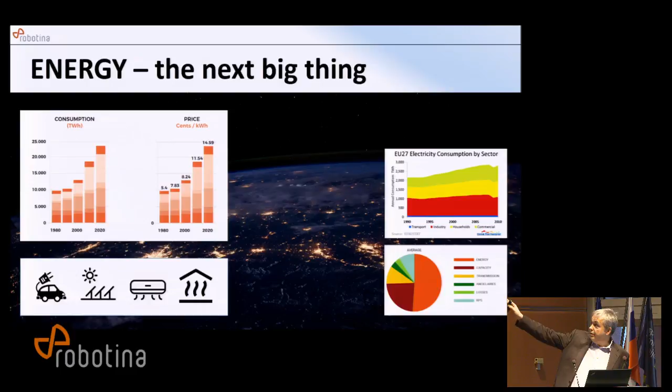Electrical energy is the energy of the moment, and we are changing dramatically many things in the electrical energy world. Look at these two slides: on the right-hand side we have consumption, how electrical energy is consumed. More than 50% of it is consumed in buildings. The lower pie shows the cost of electrical energy. Only about 50% of the electrical energy cost is the generation itself; about a quarter of this cost is the availability, the constant availability of electricity. So it is logical that if we try to do something, we act on the biggest costs first.

So look at the opportunity. We are talking about a 3 trillion euro market at this moment, and in buildings we consume about half of this. If we just consume less, with the right technologies and approach, and consume at a different time, we can save about 260 billion euro, which is not a little money. So there is a magic formula, very simple: reduce consumption and balance the grid, or use electricity when it is cheap.

So when we talk about solutions nowadays, the first thing that comes to mind is technology. When you talk about technology, we think about new technologies like Internet of Things, blockchain, or artificial intelligence. But what do we practically do, or what do we practically think, at the moment somebody says save energy? How do you save energy?

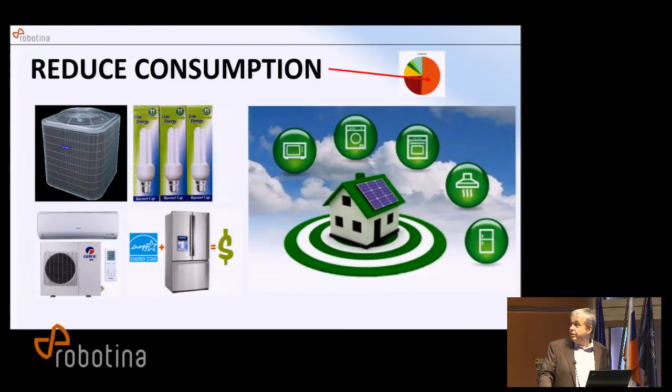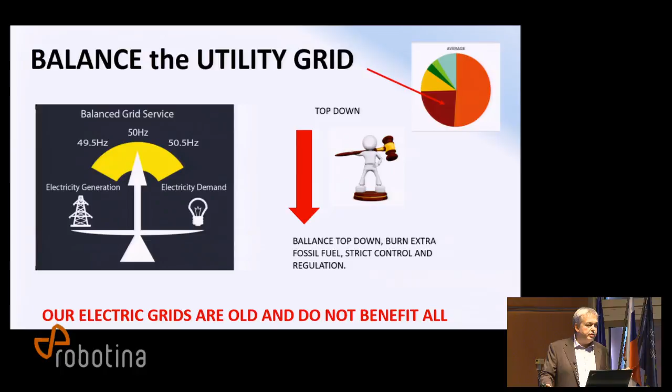We'll see. And if we look at it from the grid, from the utility perspective, they tell us: bring in the regulator and make it more strict, get better control, but everything from the top down, use power. Is this really the right way to do it? Let us think. In your history, in your experience, what brings better results: using muscles or using brain?

Using muscles or brain? Who is for muscles? Who is for brain? Wow, everybody is using brain. So what do we need? Do we need an evolution or do we need a revolution?

Let us explore together, looking at the energy landscape from a bigger perspective. We have everything in place to make our electricity grids better, smarter. There are legal frameworks in place, there is technology, and there is thinking about a smart grid.

On the other hand, we can use smart approaches. We can try to invest little or even nothing, and start saving now. We are looking at solutions that will be future-oriented, that will help save energy, reduce unnecessary consumption, and at the end of the day help us save our planet. Because we just have one planet, and we have to keep it for the children and others coming after us.

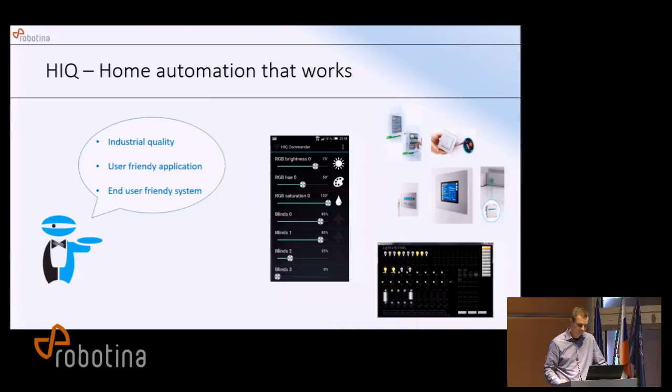Which are the main things we would like to control in our homes? First is comfort control - lights, different types of lights, shades, and of course thermal control. Then we talk about safety and security in our houses. And finally, today's topic, energy efficiency - saving electricity, money, and in the end, our planet.

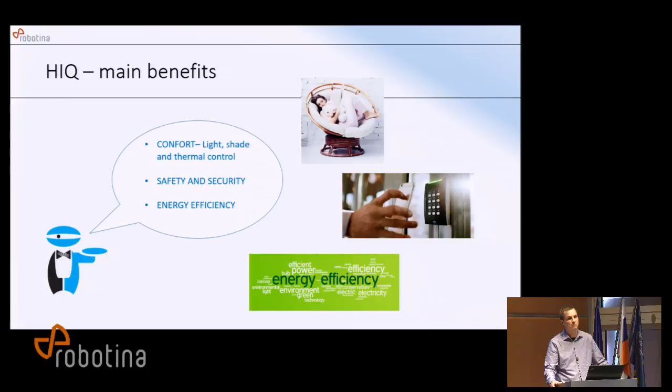In Robotina, we look at our home as a unit, not as a bunch of devices. This is why HIQ controls our home with scenes. For example, you want to watch a movie in the evening, but you don't want to bother standing up, turning off lights, lowering shades, turning on dimmable LED lights. You can just press a button on your smartphone application and HIQ will do it for you.

The same applies in every other situation, so HIQ can adapt to your needs. The same is true with thermal comfort - you can control it either with timetables or schedules, or via phone application when you're not at home. So when arriving, your home is already warm, waiting for you.

Next is safety and security. Our home automation can transform everyday use sensors into alarm sensors when we are not at home, letting us know if something unusual is happening in our house. For example, if CO2 level is rising when we are not at home, we can be sure something unexpected is happening, and HIQ will let us know.

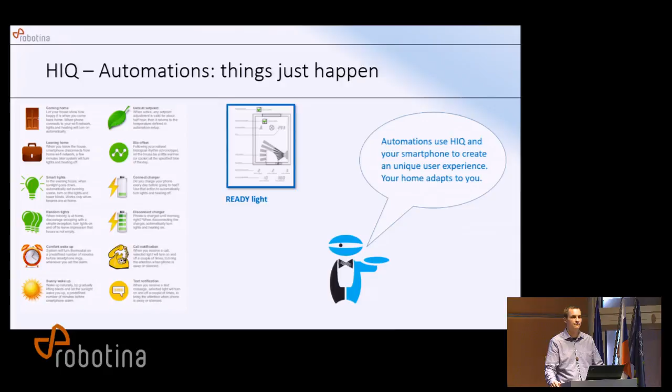Now to the topic of energy efficiency. HIQ has the possibility to make our home as efficient as possible. It will help us understand when and how we use our electrical energy. It can also help us use our loads, our devices, when we generate our own solar electricity or when the price of electricity is cheaper. Also, it can maximize our self-consumption using battery storage.

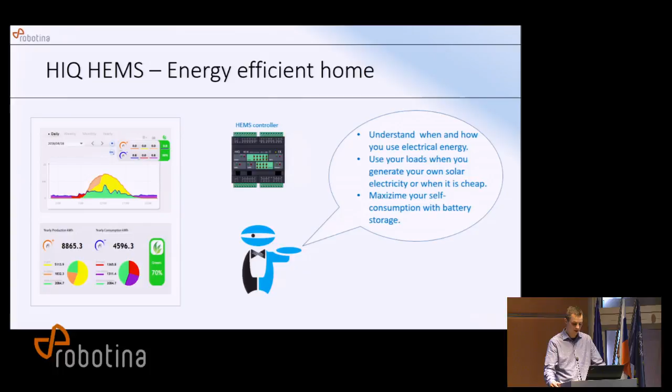Furthermore, we can gain even more benefits by connecting to the HIQ Universe IoT platform. My colleagues will explain more about it later. We can also save energy and money and contribute to the green society by becoming an active prosumer. So that's from my side.

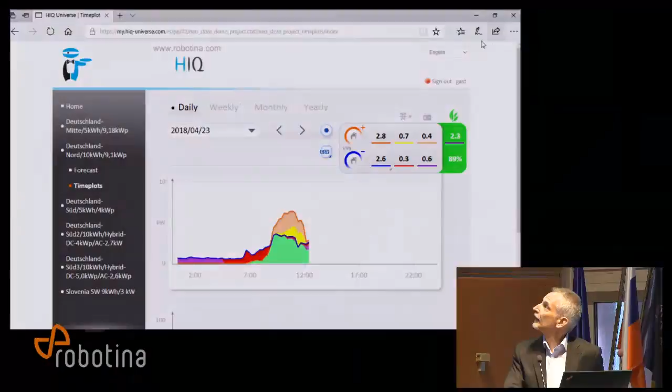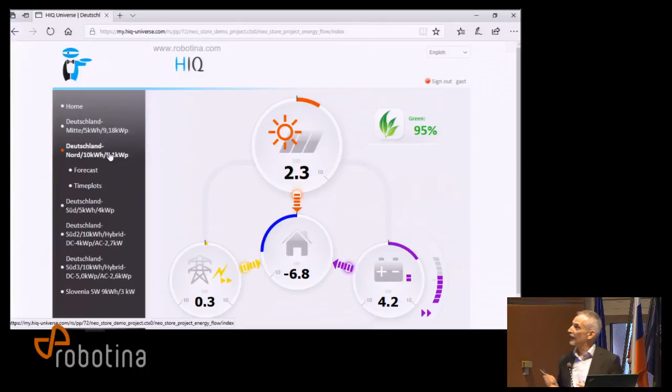So here it is. This is a live system now somewhere in northern Germany. This is our typical customer actually in Germany. The house owner has a photovoltaic plant on the rooftop.

You can see it produces 2.3 kilowatts at the moment. The house owner also has a battery storage system, which has 9.1 kilowatt, 10 kilowatt hours of battery capacity. It is, of course, connected to the electrical grid, and the house is a consumer. We focus here on the house, not individual equipment, but the house as a building.

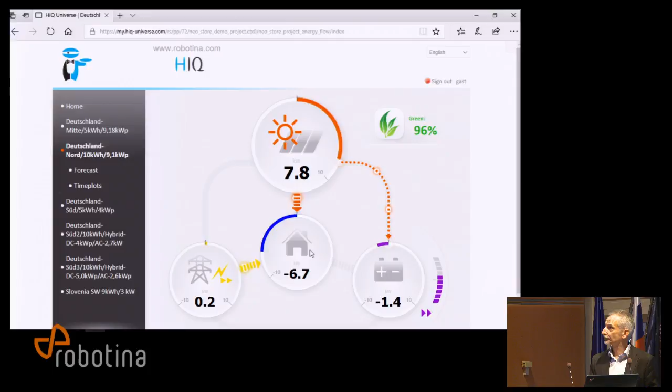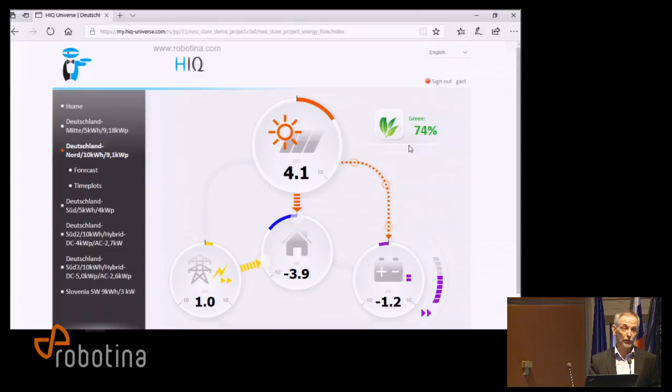Usually our customers are very much interested in the figure up here, how much am I green? This means how much of my own consumption am I able to take from my renewable solar roof or from battery? Of course, the next question is, what do I achieve within the day?

You can see today there's a nice sunny day in northern Germany. This is shown by the orange line here, which shows the production from the PV rooftop plant. The other line, the blue line, shows the consumption at the connection point of the building to the grid.

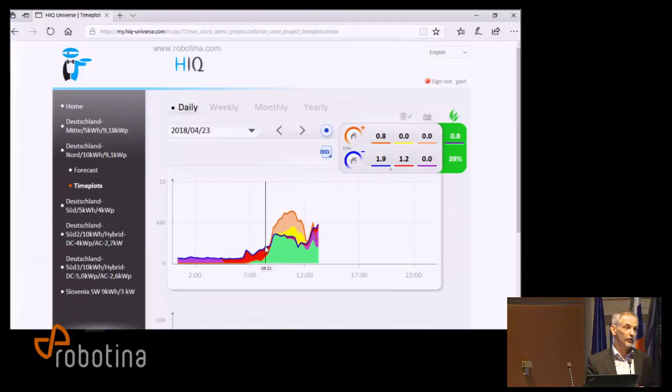You can see in the morning when the sun was starting to produce electrical energy, the consumption, the blue line, was taken from the solar plant directly. Before, in the nighttime, the consumption was fueled from the battery, and then after the battery was emptied, the house took the electricity from the grid. This is the red surface right here.

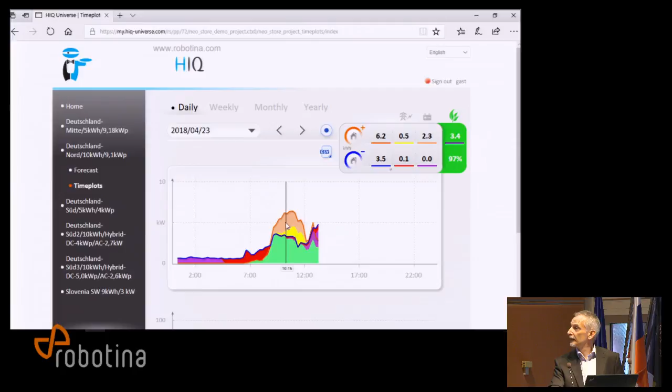Then, when the sun comes out, we get more and more electrical energy from the solar rooftop, and we're able to cover all needs here at 9:30. Everything is fueled by the PV. Then, all of a sudden, we have an excess of electrical power from the roof, and that's why the battery is here - the house owner wants to maximize his own consumption. That's why the surplus of electrical energy is stored into the battery, and after the battery cannot take the energy, the excess is fed into the grid.

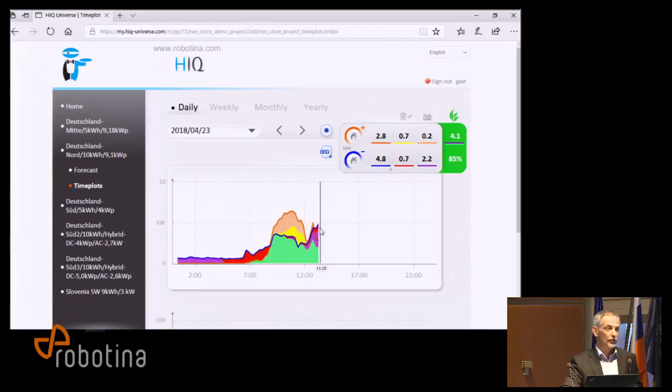So you see the profile of consumption. Now it seems we'll have an early afternoon peak. And PV is not enough, so something is again taken from the electrical grid.

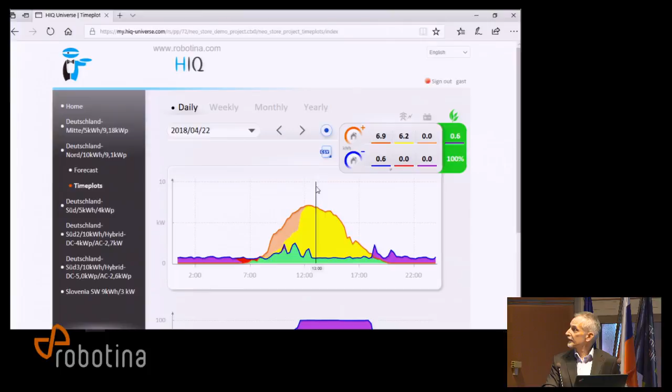Let's take a look at the yesterday performance. You can again see a very nice, shiny day. All what was needed was taken from the renewable, and the day before shows that also from the grid it was really just a small amount of energy taken.

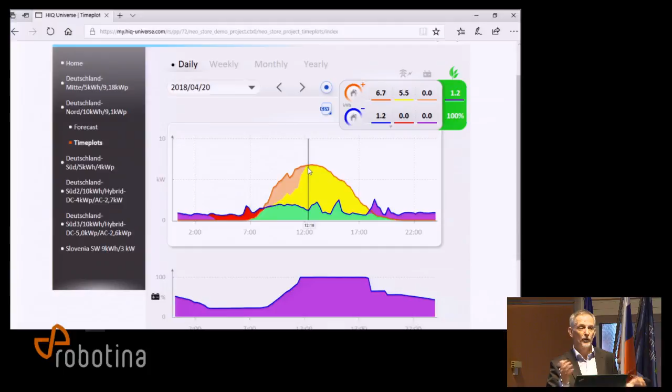Below you can see performance of the battery. At 11 o'clock it was 100% full, and then in the afternoon the energy was discharged to feed the consumption in the house. So the house owner knows exactly each day what is the profile of PV, how much do I produce, how much do I consume, do I match demand response, am I self-sufficient, so to say.

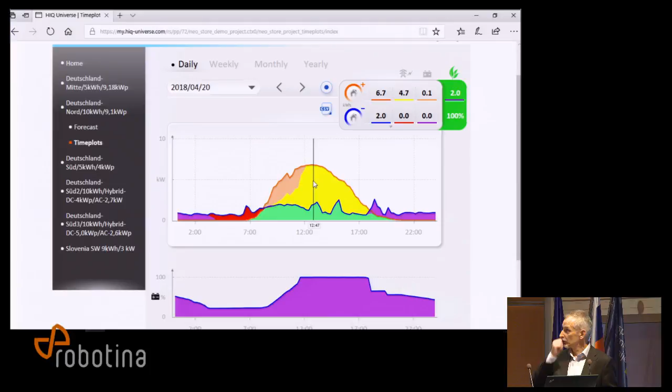Of course, self-sufficiency here is not the big thing. It's how the owner perceives the equipment, but of course he is connected to the grid, and always will also be.

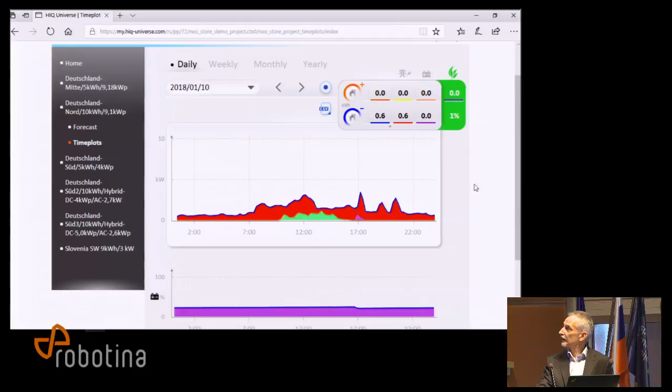We'll take a look at one day, let's say in January. Of course, then the situation is completely different. So you can see the green surface - this green surface is taken from the PV, but all the rest is taken from the grid. This is very normal in winter time in mid-Europe, and only a bit was put into the battery.

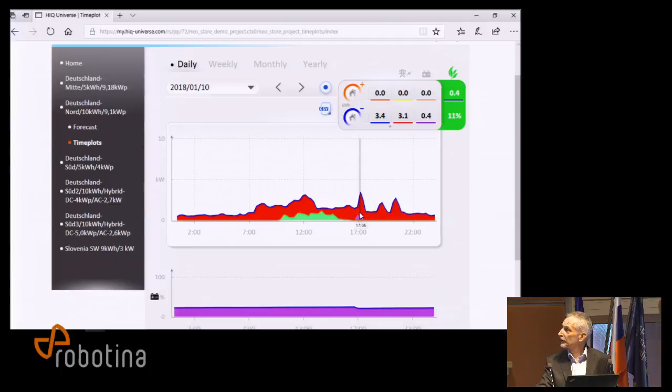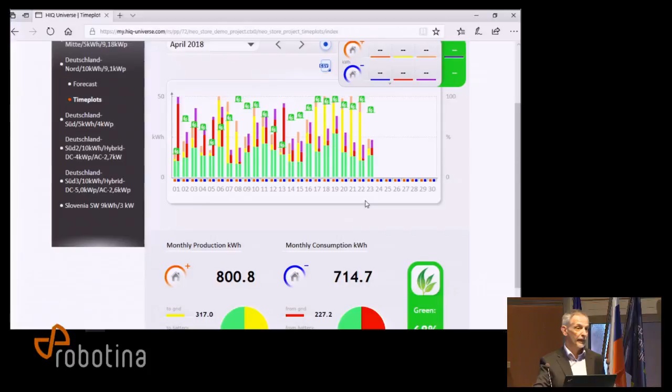Then the house owner would like to know: what do I achieve throughout the month? What are my daily achievements within the month, each day? What do I get out of my equipment? Because she invested, you might say, 10 to 15,000 euro in the equipment. So how do I perform?

And this index over here is showing the level of being self-sufficient. Of course, it differs from day to day. The average within the complete month is 68%. So the house owner can be quite happy with this result.

Monthly consumption and monthly production also are almost aligned, which is also good. This is also good for the Slovene scenario right now, which is net metering. So the user will not pay that much for the grid electricity, and also will not feed back into the grid too much.

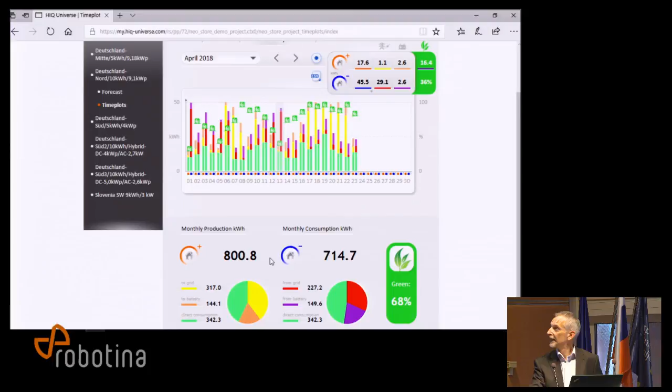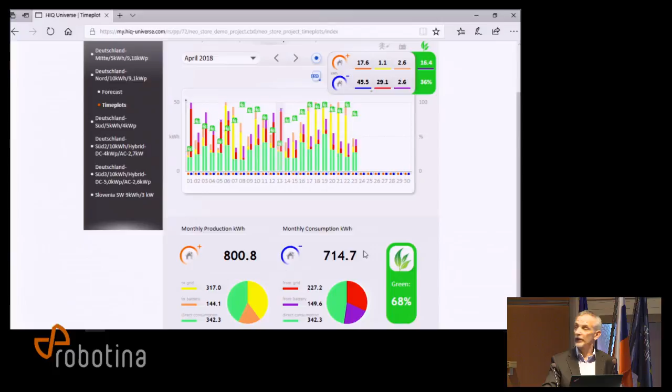And the user can also see what is the monthly consumption, but not only as a sum, but also the daily profile. When is my peak consumption? Why? So he or she can think about his own consumption in the house. How can I reduce the consumption?

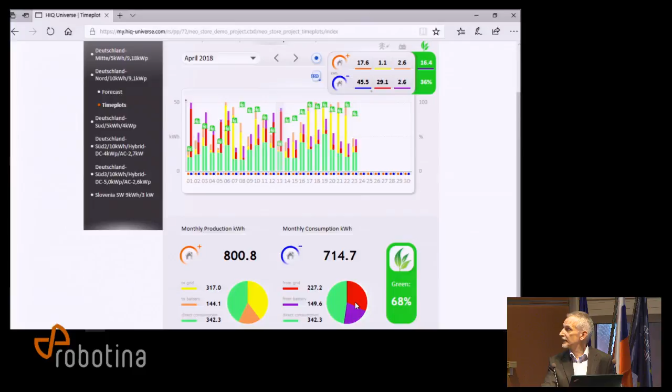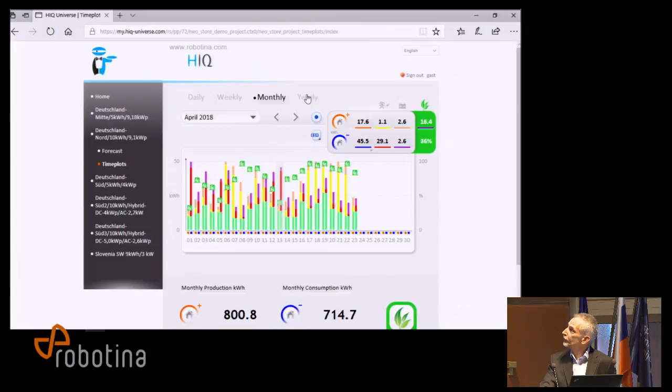Also, the user can see whether the battery capacity is okay, whether there could be more rooftop solar, things like that. And the most important thing, I would say, is also to be aware of the yearly production and consumption. So what do I achieve? Let's take a look at year 2017, when we have a complete year.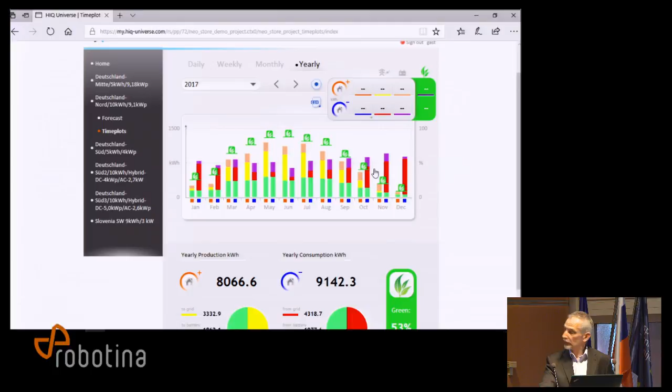What do I achieve throughout the year? Again, consumption and production is pretty much matched. And of course, there will be no systems which are disconnected from the grid. We want, by this system, to enable the house owner to maximize self-consumption by usage of his own rooftop PV and battery storage, and then the owner can start to think about...

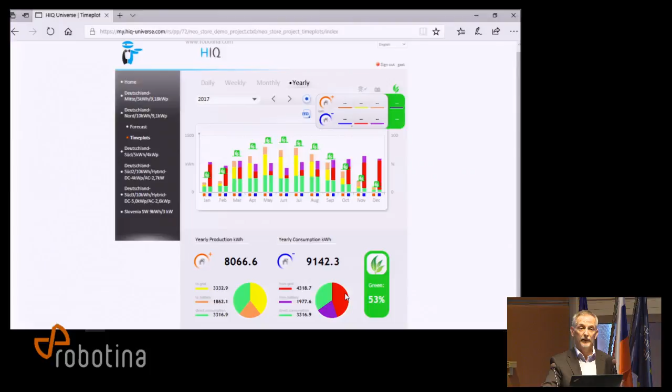How can I increase my self-consumption? How can I get rid of this yellow surface which is showing that this energy was fed into the grid, and vice versa? How could I improve own generation in winter months?

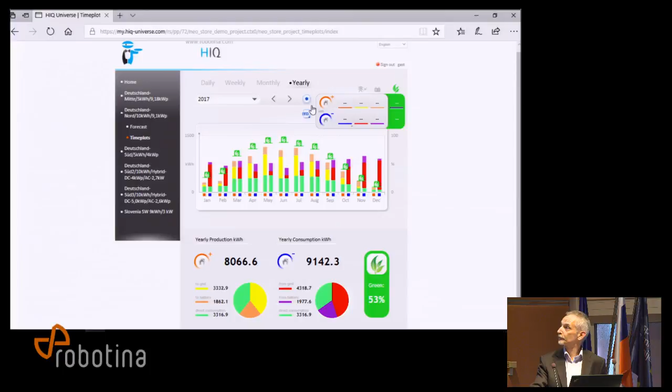So by this, the user, the homeowner, can be quite satisfied. He or she is contributing to green society, contributing to renewable energy sources. So the system shows the performance.

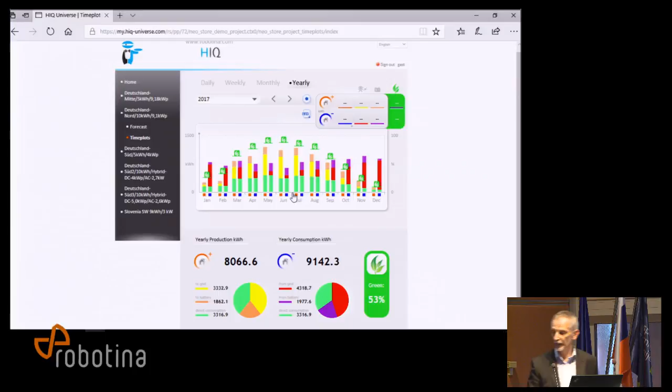What would you be interested in if you would be a house owner of a system like this? Do you have any idea what would arouse your attention? For example, what is the return on investment of those 50,000 euros?

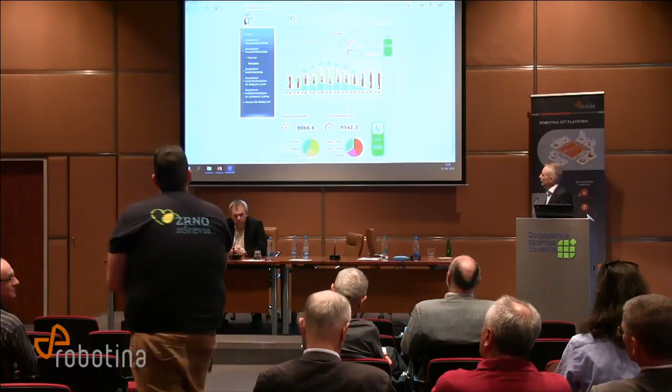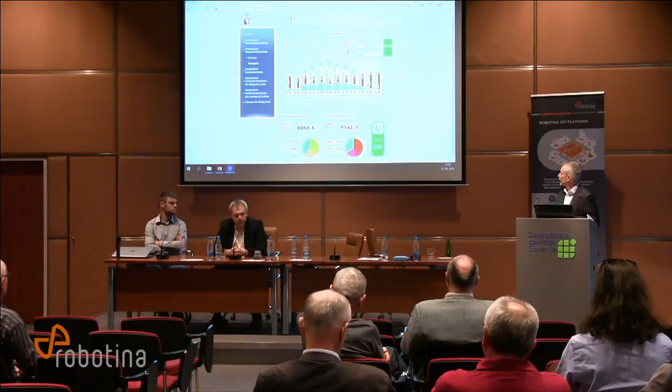Yes, this is a good question, and this is particularly a good question for Germany. Thank you for this question, because the ROI actually comes from the conditions, the regulation that are put in the German market. And this says that the grid electricity bought for house consumption is charged at 29 euro cents per kilowatt hour.

On the other hand, when you feed into the grid, you get only 12 or something euro cents per kilowatt hour. So this gives you a ratio of return of about 8 to 10 years nowadays in Germany. And of course the feed-in tariff goes down to zero, and they say also that the price of energy will go up.

So basically the decision to invest in such a system is based on this: let me help the green society, let me feel secure about my future and not exposed to risks of increased prices in future. Because the system is in operation for 20 years, so the remaining from, let's say, 8 to 20 years is something that you really earn.

To give a short note on the situation in Slovenia, this scenario does not work. With net metering as it is now implemented in Slovenia, you only care about yearly achievement. So is this matched? In principle, the difference is not too big in one direction or the other, then I'm satisfied. So nobody really cares what happens within the day. All this burden, when you get a lot of PV, is then put on the grid operator, and this is what we speak about in the next section.

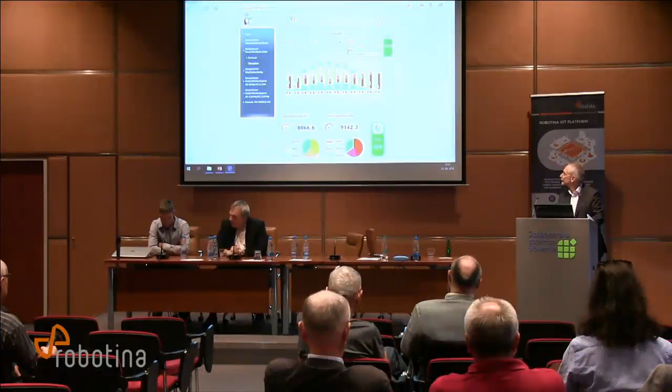I will skip the slides which I prepared for safety in case there would be no internet. So this is like a wrap-up.

Yesterday was Earth Day, the 22nd of April. So how can I help to save the blue planet? As we said, by promoting or investing in renewable power, by minimizing usage of fossil fuels, self-consumption of green energy, and of course energy efficiency. So with our system, we actually promote a green thinking attitude at the house owners.

But then the other part. As I said, there are different concepts to promote investments in renewable energy sources, and you might know there were huge supportive schemes in Germany called feed-in tariffs 10, 15 years back, when users could earn up to 50 euro cents per kilowatt hour. Of course, the price of equipment was not as it is today. But the strategy was to lower the feed-in tariff yearly, and by this, the challenges which arise somehow motivate people to cooperate in bringing stability to the electrical grid, which is now in transformation.

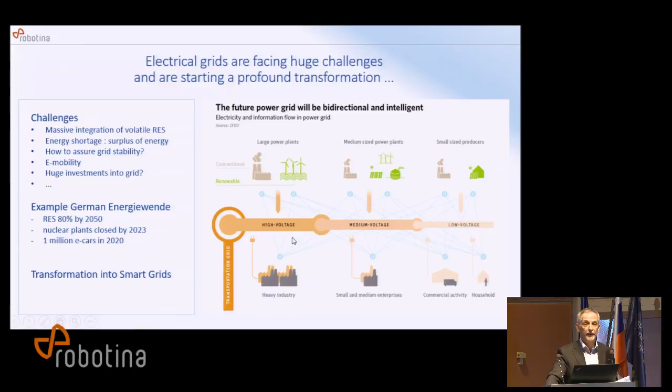So this brings us to the main idea of how, with HEMS systems provided by Robotina and HIQ Universe, which integrates HEMS in one platform, prosumers can contribute to electrical grid stability.

These are the houses all over the place. Each house has its own, as we saw, consumption profile. It might have the rooftop generator, electrical car, whatever. So each house has its own energy profile.

This means that when you promote the feed-in tariff, everybody will just feed electricity into the grid, causing congestion, or there will be excess electricity when there is peak production. And another way, when there's peak consumption, again you have no contribution from them. So our idea is that we aggregate the prosumers, the houses, by their own energy management systems, aggregate them on the level of HIQ Universe, create flexibility of usage of electrical energy in time, and offer this flexibility to grid operators to more easily or dynamically manage the electrical grid through participation of HEMS prosumers.

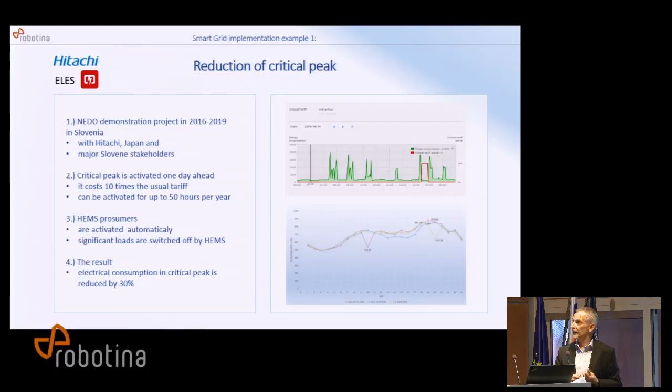The third situation is introduction of HEMS, which can be much more flexible than these two. You cannot really control those other methods well, or you can have very good results at the very beginning with sending SMS, but then people might not follow anymore. So the HEMS system is integrated into home energy management, and the idea is also to integrate it later on with smart home automation.

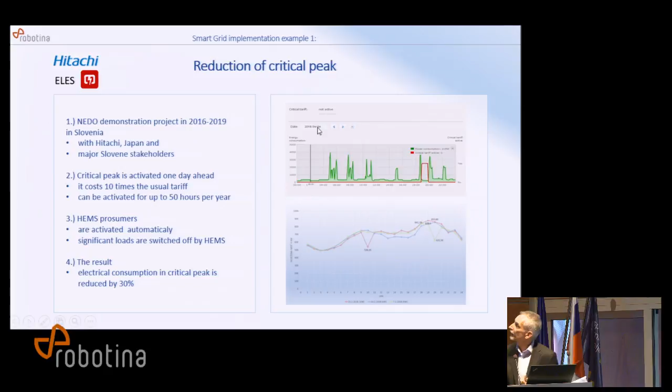So the HEMS prosumers get activation automatically - server-to-server communication between the ELES server and HEMS server, HIQ Universe, sends the forecast for the next day. Here in the upper right corner you can see one such scenario, from April this year, and this is the activation.

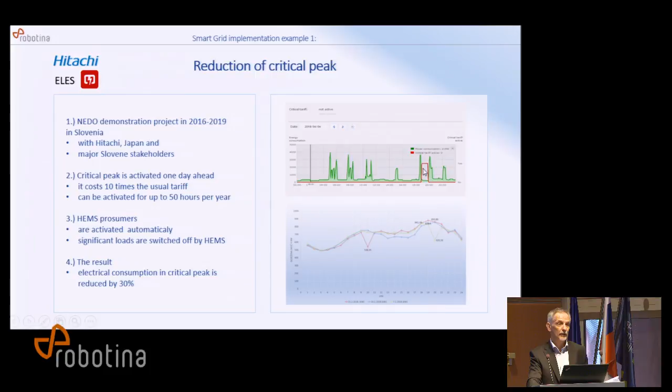Between 7 and 8 p.m. is the critical peak. Our HEMS system receives this from the server and then activates at the prosumer so that significant loads are switched off. By this, you can see very clearly the peak consumption is really minimized. Of course, we cannot switch everything, but what is controllable, we take into the system, and we really guarantee that this will be reached.

There are also results already available from the grid operator, Elektro Maribor. They say that when they did the activation, the result as a whole was a reduction of critical peak, on average, by 30%.

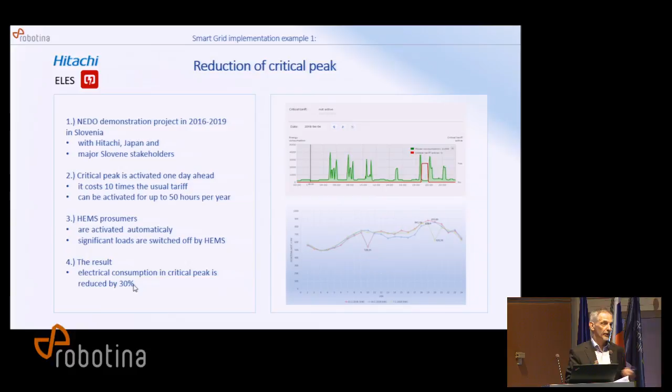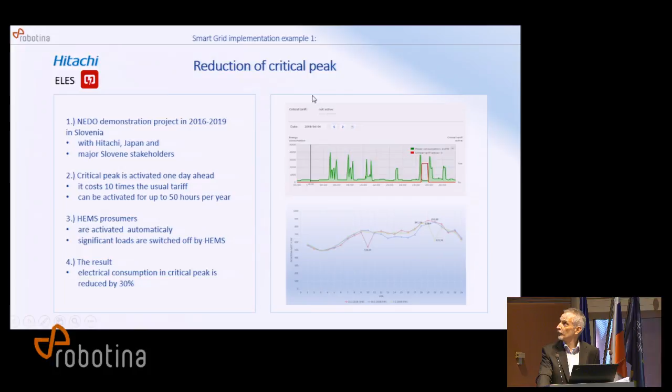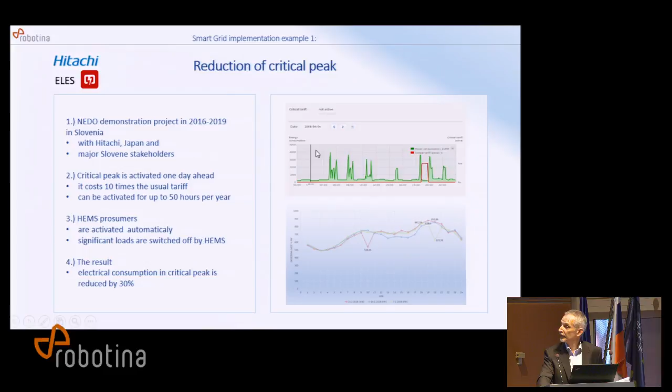So the achievement is quite good, and it shows the potential - although you might say one house doesn't contribute a lot, when you put many houses in the region, you can really achieve local targets. You can be really dynamic in this reduction of peak, which is very good for the DSO because they might avoid huge investments in the grid at the region, in cables or transformer stations, whatever the situation is at the site.

Another example of smart grid implementation is a project also supported by NEDO, the governmental agency from Japan, again with Hitachi Chemical here, one of the major vendors of lithium-ion batteries globally. They selected Robotina to deliver the energy management system for the project, on the German side, in Speyer, Germany.

The idea is to prepare an energy management model for the future - from a feed-in tariff system, Eigenverbrauch as Germans say, to participating optimization of usage according to local circumstances.

In this particular project, these local circumstances are reflected in the price of energy. So the price of energy is set hourly - each hour, one to four days ahead, gets a particular energy price, both electrical and heat.

So our system is prepared in a way that it is able to optimize in-house production and consumption accordingly, so that the user has minimum costs, and the DSO gets good stability of the grid. Domen will later on tell much more about this, but just to say what are the main features.

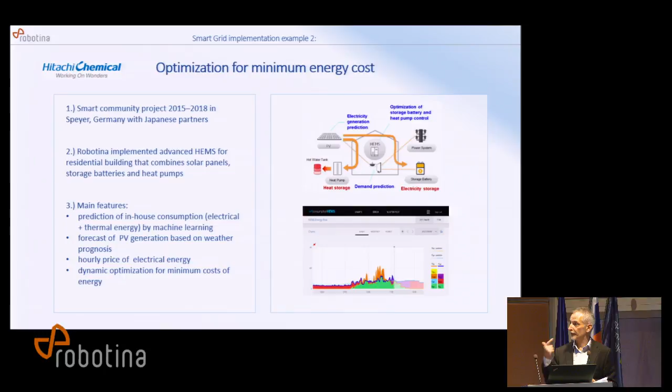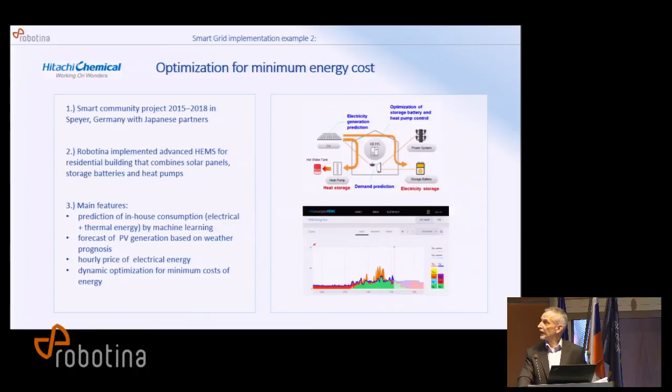We get SOC for the batteries, we have temperature for the heat pump and for heat reservoirs, and by this we really adapt to what the DSO needs. So this is really, I might say, a state-of-the-art implementation of a smart grid project.

And the third one is H2020, European-funded research and development, but mostly it's an implementation, demonstration project, which puts together the stakeholders who are all relevant to take this smart grid into consideration. So there are DSOs from Germany, Switzerland, and Cyprus.

There are institutions, faculties, universities that help them in local implementation of such a system. There are solution providers from Slovenia, 3 companies: INEA, Etrel, and Robotina. And there is IBM as a managing partner. So it's quite a challenging project.

Our ambition is to set up a vertically integrated solution which will enable dynamic trading of electrical flexibility. So when you have a potential to adapt to something by changing your behavior of electrical consumption, you offer this to the grid operator or to the system, to the automatic trading platform.

We call this a flex offer. You send the flex offer to the platform. The platform knows what is the situation in the market, because this is reflected by the energy price, which in the market changes constantly. And then they give us feedback on whether we should increase consumption, minimize it, or what would be the schedule for the next hour, 4 hours, whatever the period.

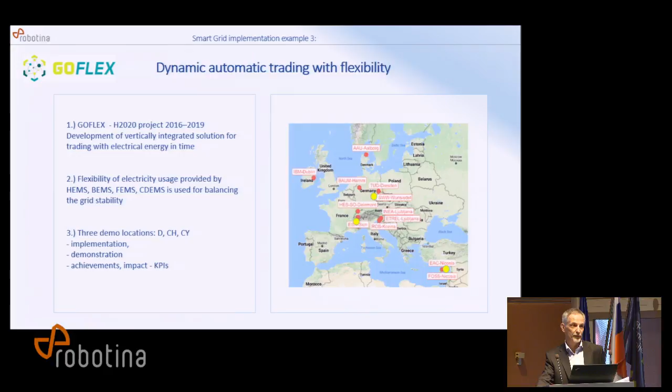So this is something like a wrap-up for this mind shift that we are trying to enable, the change into a decentralized energy market, which is implemented massively with renewable energy sources. So traditional, on the left hand, there are concepts like feed-in tariff, limitation of PV generation by just maximizing the PV output, net metering, fixed daily tariffs.

So the core thing is that all these concepts put all the burden onto grid operators. All the costs, all the burden, everything is on the operator. The investors just take money from governmental support, incentives, and they are happy. So they only care about maximum production and return on investment.

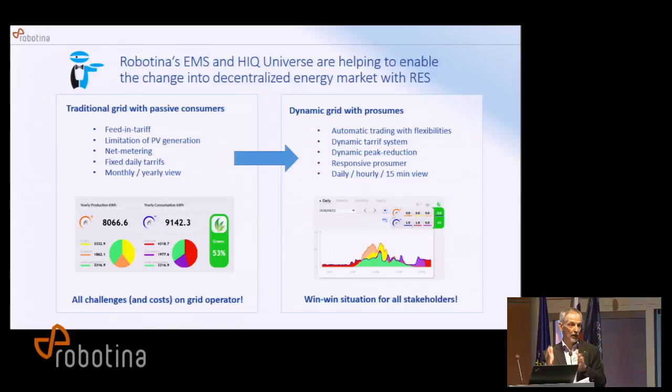So this has to be changed when renewables are implemented massively, because we need really dynamic grid stability. There are concepts which I just showed a few: automatic trading with flexibilities, dynamic tariff system, dynamic peak reduction, and all of those really want to activate the flexibility at the consumers and make them prosumers. So the time horizon changes from year or month to day, hour, or 15 minutes, or even less, to be really dynamically responsive. And this should really bring a win-win situation for all stakeholders involved.

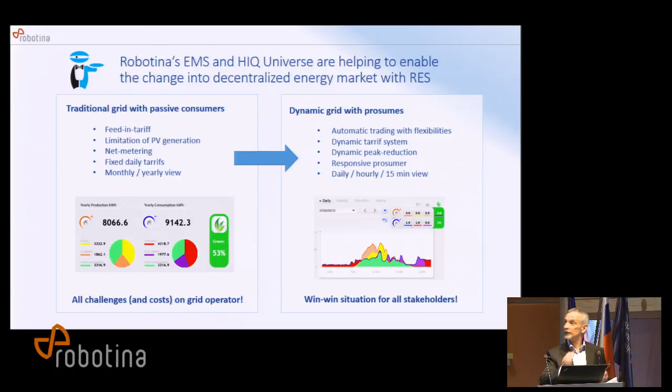Do you have any comments maybe here? Somebody from the audience, do you agree with this basic idea, basic concept?

Yes? I understand right. If I understand right, this is the sharing of electricity between these stakeholders.

Sorry, can you please repeat? I did not really get the point. If I understand right, this is the sharing of electricity, excess of electricity between these stakeholders. So the idea is that each of the stakeholders - the transmission grid, the DSOs, the traders with electrical energy, and the consumers - they all look at the real viable challenging items which can make the difference, so that real relevant issues are addressed in the right way.

And with all these renewables installed in the grid, this means dynamic optimization of usage, matching the production. This is the main idea. And as said, the real game changer will be massive implementation of electrical cars, because many of you are aware that it is not possible to fuel a lot of electrical cars with the existing grid. So huge investments will have to be made to enable this, but this is then the right approach.

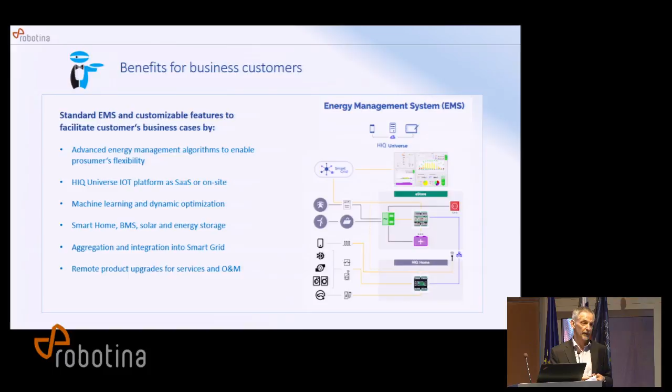Thank you for your attention. I can take one or two questions.

Yes, thank you very much for your presentation. I wonder if you have any calculations regarding, let's say, cost for CO2 emission reduction of 20% by 2030 or something like that. What would be the result if we include 50% of Slovenian homes into such a system? And of course, what would be the cost of investment?

Thank you for your question. Unfortunately, we do not have such a calculation in the company. We are a bottom-up provider, so we want to enable the implementation of such a system, but the relation to national policies and the calculations, as you said, should come somewhere in between. We'd like to share with you how we see it - we prepared a bunch of products. Just now we have a new family of HEMS products which enable easy retrofit installations, because we know we have to enable retrofit in existing houses with no wiring, with wireless implementation, to make it easy and cheap. So we want to enable massive implementation of such systems, because one house does not bring a lot of tons of CO2, but plenty of them, they really contribute.

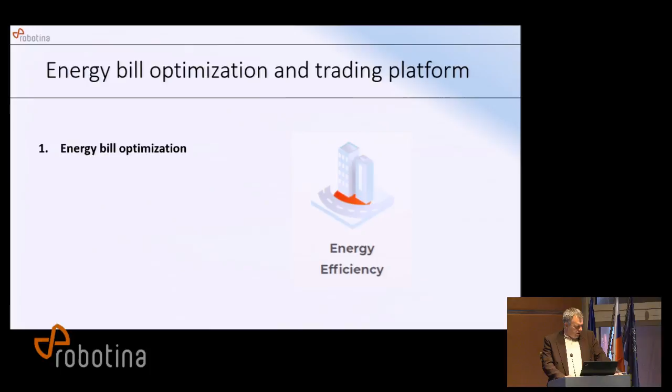Next one is group buying. So we will aggregate users that are part of the community, and we will buy electricity together. When you have 1,000 or 10,000 users buying electricity, you have much more negotiation power than if you are buying by yourself. Actually, if you are buying by yourself, you cannot negotiate, you can just choose which provider you will choose. But if you are 10,000 users, then you can also make requests to your electricity power supplier.

And the next one is power trade. We have heard about photovoltaic and also batteries, and we can sell this electricity together. If we are selling a couple of kilowatt hours, it's not very much, but with 1,000 or 10,000 users together, there is 20,000 kilowatt hours or 50,000 kilowatt hours. That's quite a bit, and we will sell it to the best bidder.

We can also do something else - switch off devices for a short period of time. Boiler, heating, air conditioner, all can be switched off for a short period so comfort won't be affected. But combined together, these power savings will be something, and it could be sold to the grid when needed, especially when demand is high.

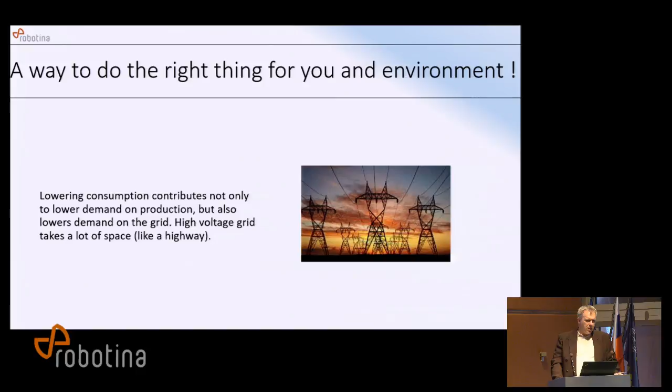And let's call this a responsible view: if we consume less, we don't just put less pressure on power generating, but we can also put less load on the power grid. And the power grid is quite expensive, and it also takes a lot of space. One high voltage power grid takes nearly as much space as a highway. So the good things are here.

So for conclusion, using our smart technology will help you optimize your electricity bill in three ways. It will enable you to even earn money selling surplus energy to the grid, and you will also do something good for the environment.

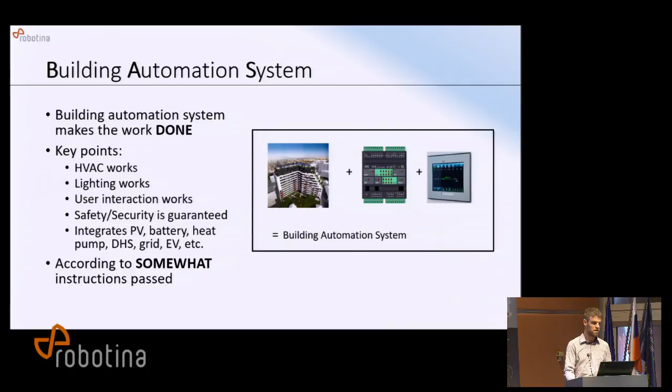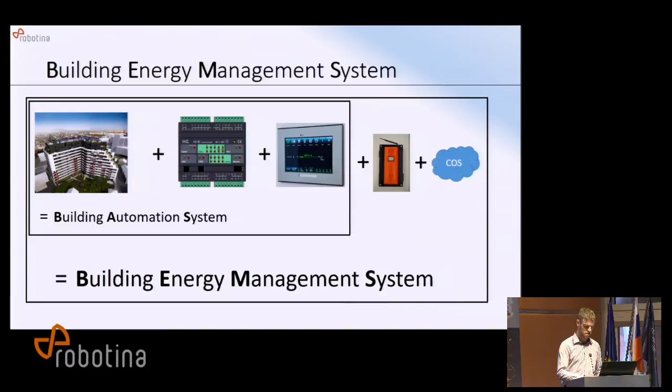So we can think about dynamic pricing in the future, and therefore we are introducing the IoT linker to connect this building automation system to the cloud, which is our notation as a cognitive optimization system, so that this energy management system can take various different requests from the user, from the grid, from our components installed, to make smart and optimal decisions, which we would like to achieve with this system.

So the building energy management system is the one who determines the instructions mentioned before. But how to do this? Would we like to save energy and be efficient, or would we like to increase comfort, experience, or well-being at our home? Would we like to do some trading with energy - buy at a lower price and sell at a higher price, which was already mentioned before?

And if we know that we have some heat pump with a water storage tank, or batteries, or just a water boiler, Dusan already explained how we could also do some energy shifting - shifting the buying of energy from the grid, so that we heat our boiler a bit earlier at a lower price and just consume it later when the price for electricity is higher.

However, our cognitive optimization system does integrate various concepts. Especially, we are focused on energy efficiency, on smart grids, and we integrate automation with security, and try to do some fault detection to improve the reliability of our system.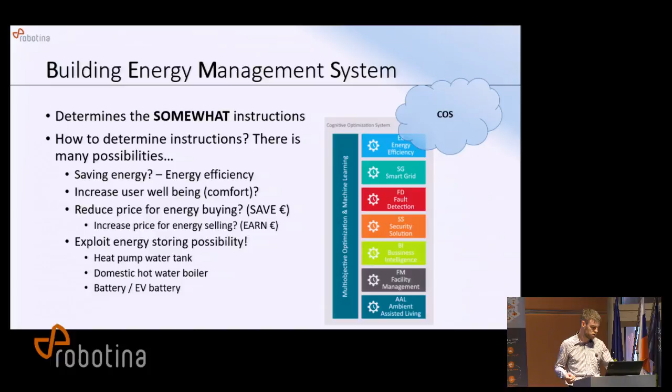Our wishes are contradictory by default, so it's very popular to be green and eco today, but on the other side we would like to feel comfort. So how to manage these things? It's the point of optimization.

I'll give you two brief examples how we cope with that. One example will be in the grid trading, and the other will be in comfort management at home.

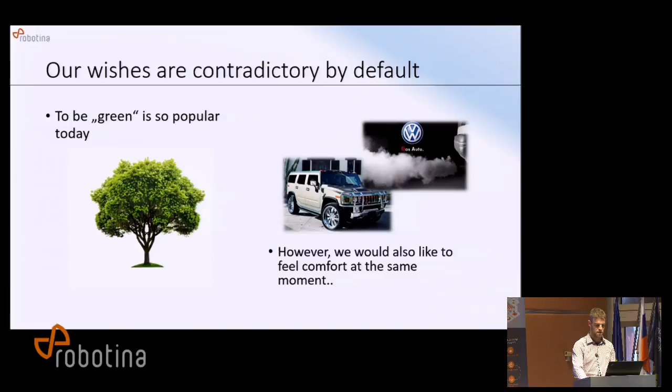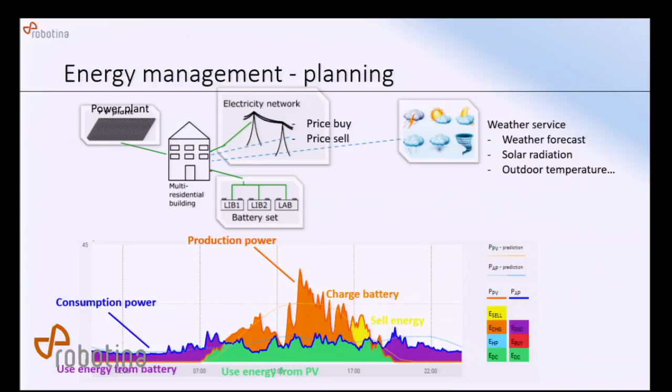So imagine this chart, maybe it's familiar to you from before. Here you can see some areas explaining where this energy comes from or where it goes to. But the most important thing is the apartment's consumption, which is the blue line here. And of course here we have a solar power plant, so this line shows the production.

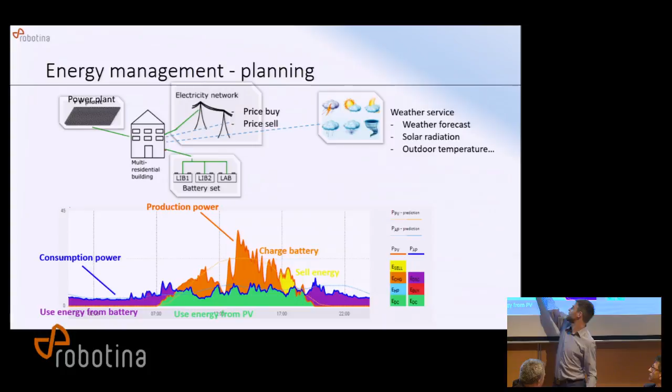There were some clouds around. However, we can see that this is quite a fluctuating thing. So it's very important here to have some battery so it can make a buffer, to not expose these fluctuations to the grid.

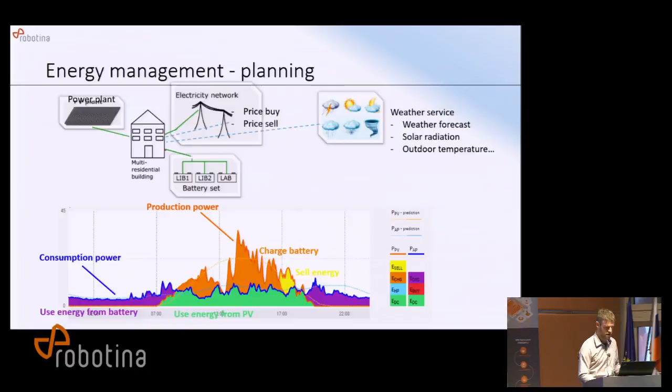However, that was yesterday. How will today be? We are now at some moment, so what would you like to do? Would you like to sell energy for low price? Would we rather store energy and maybe sell it later, so a lot of questions. Should we charge batteries? Should we charge the electric vehicle? Will we need it? Will we need heating?

So that's actually the question for management. Which action is optimal for my budget, for my environment, and for my comfort? So we should first ask the question: what will happen in the future?

So the first part of energy management is prediction. What will happen in the future? Because if we can do more or less accurate predictions, we can make more or less good plans afterward.

So first, there is measurement. We come to the point when we want to question: shall we buy, shall we sell, shall we charge, discharge, shall we heat the boiler, and so on. So the other part is forecasting, and here is some example.

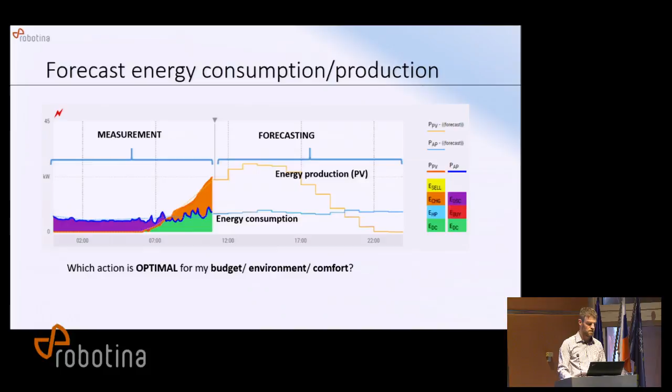Forecasted energy consumption profile and forecasted energy production profile. When we do this, we have a good baseline to do the planning part. So that's the other important part after the forecasting.

And we decide, okay, let's charge the battery there, we will sell energy, and on the bottom we will consume energy. Maybe this chart is quite intuitive, not so complex, but imagine if we have a lot of components and energy price. Maybe if the price profile would be a bit different, this plan would not be relevant.

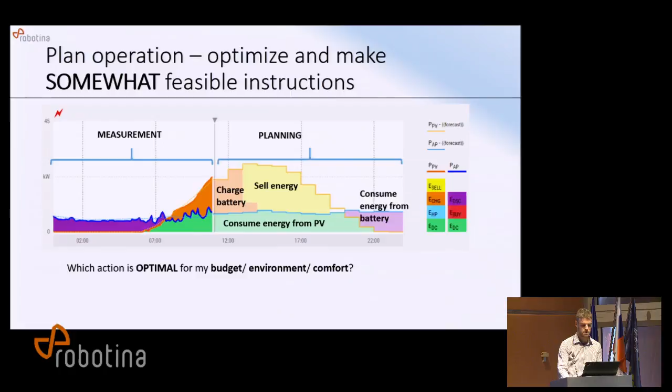So now I would just briefly jump to the other side, so the comfort and energy management. I mentioned before that these goals are normally contradictory. More comfort is normally more energy consumption, and vice versa, less comfort is less energy consumption.

So we can stay in some normal way, have some schedules, they work, they quite reflect our demand. But if we want to increase the comfort, we will probably have to increase the energy consumption.

So our quite simple, intuitive philosophy is to take care of comfort when it is needed. So for example, if we are at home, let's have better comfort, let's take care that heating will work, that we will not save on lights and walk blindly through home in the darkness.

But when we are not at home, let's reduce that consumption as much as possible. So it can lead to some saving, but as mentioned before, when the system does it all for us, it can together summarize into larger savings.

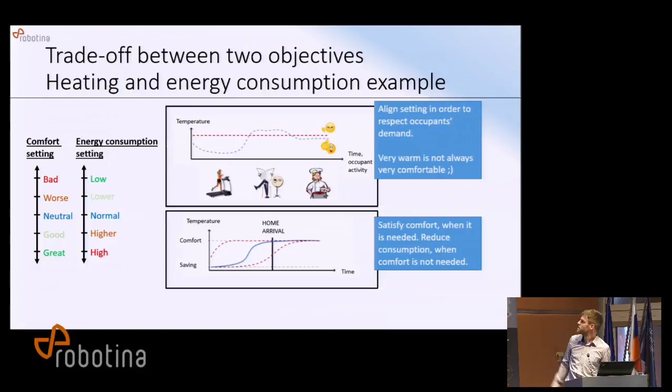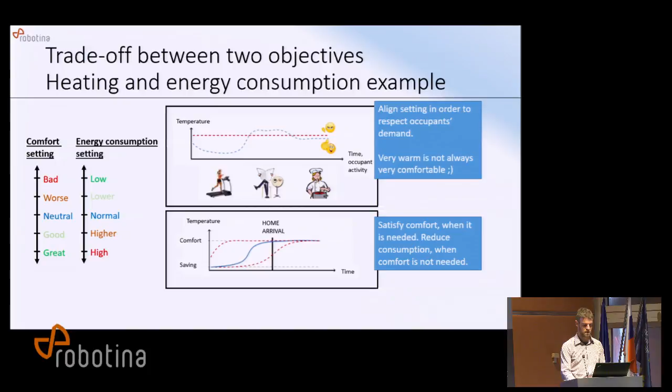So that is our philosophy, and as you can see, these two ideas we believe can reduce the consumption for all together. So that's the last slide, and if you have any questions, you are free to ask.

Can you please tell us how artificial intelligence within the platform actually helps the HEMS in a household? What the data which comes from the HEMS actually means for the artificial intelligence, and how the algorithms applied within the platform will actually manage to scale the user base when the scaling begins.

Okay, I hope I understand clearly. For artificial intelligence, really pure artificial intelligence, it's very important that we get some data on which we can do some summaries. We don't have an exact formula that today the production of energy will be such and tomorrow will be such, but we have to somehow observe past occurrences after which we can do predictions for next hours or days.

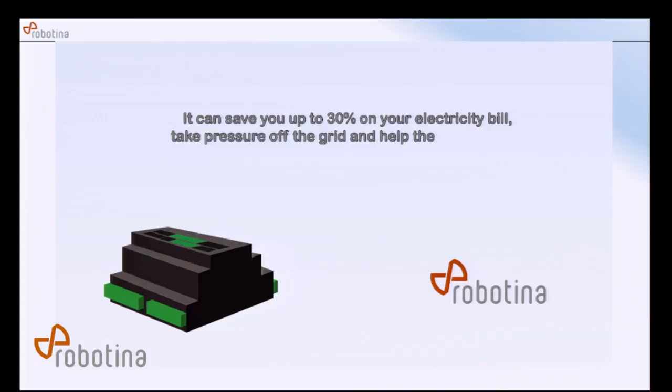Electricity is one of Earth's most important commodities, but the way we use it is far from perfect. Constant demand causes uncontrolled peaks in the electricity grid. When that happens, consumers can pay up to 20 times more for their electricity. Is it possible to reduce an electricity bill by up to 30%? Yes, but you need to start to control your house - adjust your thermostat constantly, switch on your boiler only when it's cheapest to do so, run your dishwasher only when it's full, unplug electronic devices when you're not using them, and manage all your appliances manually. You don't have time to do all that. But thankfully, Robotina does. Robotina's smart technology manages your electricity consumption. It can save you up to 30% on your electricity bill, take pressure off the grid, and help the environment by reducing energy waste. So how does it work? It all starts with HEMS, Home Energy Management System. Robotina customers receive and install HEMS, a smart device that keeps track of individual appliances and overall energy consumption. Once HEMS is installed, it starts communicating with Robotina's platform. The system uses AI technology, weather forecasts, and energy price data to optimize your electricity consumption. That's not all. Robotina's smart grid platform enables aggregated data sales, group buying, power trading, smart brokers, crowd financing, Robotina's marketplace. The key to all of this is the Robotina Utility Token, or ROX. It's the universal token of Robotina's platform. Robotina, empowering people.

Okay, to go further. So Robotina IoT platform will be the connection point of electric energy distribution on one side, which has situations or problems with the old, inefficient electric grid, which is not able to cope with today's challenges. On the other side, we have households or consumers which tend to have the lowest possible cost of electricity. So we join both sides together here. How does it work?

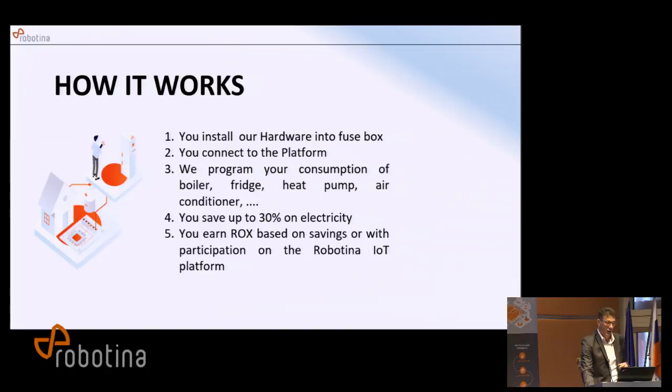So saving on electricity is just one thing. You can earn or save even on our services which we are offering on the platform. On the platform, you can earn ROX, which I mentioned is our utility token, and you can earn it based on savings. The rest we will talk about when I explain the services. ROX as a token will be a utility token, and it will be used for all business transactions that happen on the Robotina IoT market platform.

What benefits does it bring us? It brings us benefits from all business activities that will happen on the platform. As my colleague Dusan already went into detailed explanation, I will just briefly go through. You can buy with ROX token all products from Robotina, and of course you will get an additional discount.

Data sale, dynamic energy pricing will bring benefits to participants. Internal power trade, group buying, and ESCO crowdfunding - what does it mean? It means that all participants, all ROX owners, will be invited to fund potential projects in the market, and of course, as a reward, they will get benefits. Hardware financing as well.

So you can participate on our Robotina IoT platform as a connected or non-connected user. In both cases, you have benefits. Connected means that you have your HEMS connected from your house to the platform, and not connected means you are just participating on our platform and using the services.